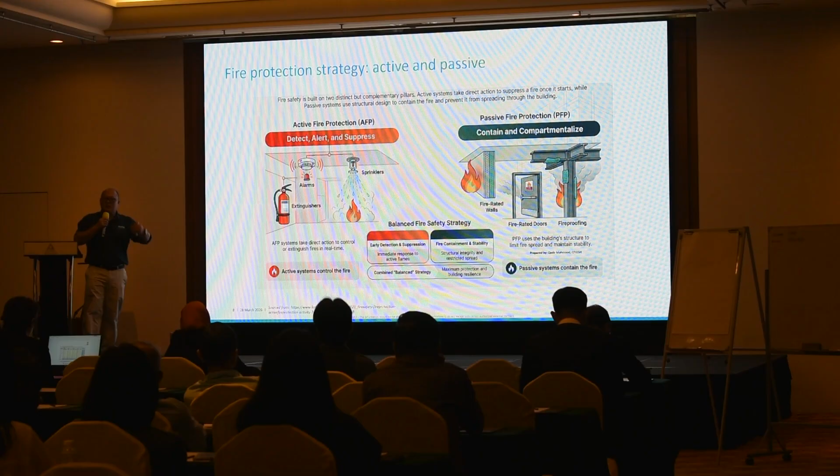So sprinklers, alarms, extinguishers, fire suppression - they are all classified as active fire protection, whereas passive is a built-in element. Once built, it just sits there silently working 24/7. So when a fire happens, the role of passive is to contain, to control the fire size from spreading to the next door, the next room, the next compartment, whereas active is the one that suppresses the fire and ultimately puts it out.

Today my sharing will be more passive. We talk about how all these solutions can integrate into your building design.

But before we go into the details, first some theory about fire: reaction to fire and resistance to fire. They sound quite similar, but the meaning is quite different. Reaction to fire talks about how the material reacts when it contacts fire, whether it burns, whether there's no reaction, or whether it generates smoke. It's all about a single material, a product approach. Whereas resistance to fire, on your right side, is about how a complete assembly, a system, limits the spread of fire and smoke.

So there are a few criteria that we measure in testing. First, load bearing capacity, sometimes called stability, noted as R, measures the stability of a system. Let's say within 2 hours, this system - a column, a beam, a floor - should be intact, it shouldn't collapse. If there's any failure, sagging, or deflection more than a certain limit, we consider it a failure. Collapse is also considered a failure. So it's all about structural integrity.

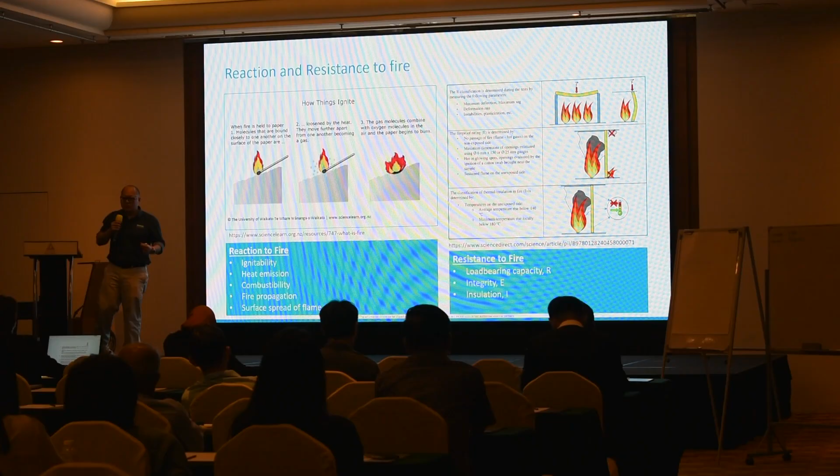The second criteria we measure is integrity, noted as E, which measures the behavior, the pattern on the non-fire side. So the criteria is basically: if next door there's a fire, with this firewall, there shouldn't be any passage of fire and smoke. It shouldn't have any crack or opening. And something invisible that we cannot see, which is the heat. When there's an actual building fire, the temperature easily goes more than 1000 degrees Celsius. So standing next door without a proper firewall, you will become a barbecue.

So there's another criteria we measure, which is insulation, noted as I. This basically measures heat transfer, how well this system or assembly can block the heat when there's a fire. The criteria is 140 degrees Celsius average temperature and 180 degrees maximum temperature on the non-fire side.

So this is just some comparison between reaction to fire testing and resistance to fire testing. Normally for product-based testing, the scale is smaller, done in the lab, where on the left is the calorific capacity test, whether we follow BS 476 part 4 or ISO 1182 - it's all about calorific capacity test, basically the top ceiling for product performance.

Then for reaction, the temperature maximum is 750 degrees Celsius for furnace temperature. Whereas for resistance to fire, normally the scale is much bigger - most of the time we need to represent the actual construction. So the furnace is also much bigger, whether 3x3, 4x5, 5x5, or even 5x7 meters.

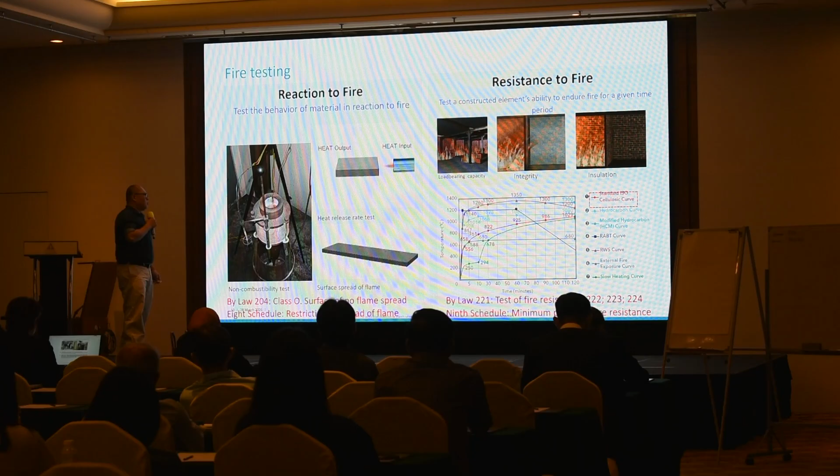There are quite a few fire curves. The red line is the standard time-temperature curve, sometimes referred to as the ISO 834 curve, which is widely adopted in BS and similar standards, basically for building fire. At 1 hour, it's about 950 degrees Celsius, and at 2 hours, slightly more than 1000 degrees Celsius. This is the fire curve widely adopted for building fire. Depending on your purpose and building group, other fire curves can be applied as well.

For example, when there's more petrochemical industry involved, then we use hydrocarbon curves. Even for hydrocarbon, there are two - one based on UL, which is more intense. At first 5 minutes, you need to reach 1200 degrees Celsius, and then maintain that for the remaining hours. But of course there are others, like for tunnels, trains, facades, and so on.

So this is just some reference for how a fire test looks like. There are different applications. On the top left is vertical testing, where we test, let's say, for partitions. The second and third work very similarly - horizontal elements, like for ceiling and floor. But in the third one, you can see there's a hydraulic jack above - this is where you need to apply a load during the fire test, making the testing more onerous.

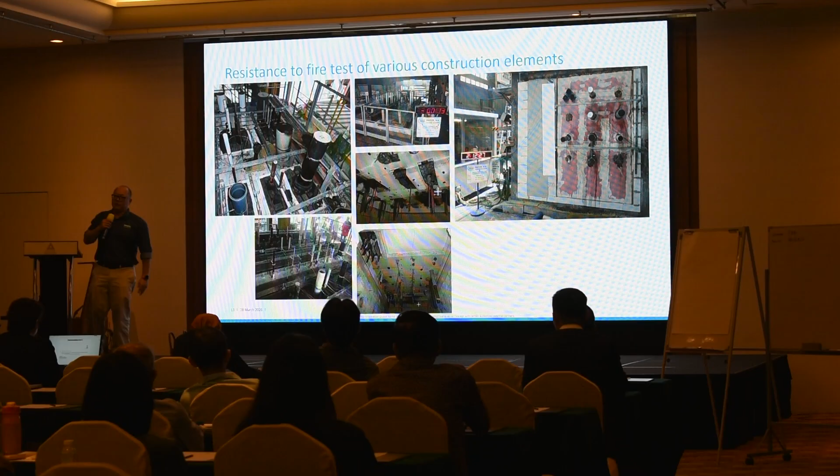So after all this, basically what we want to emphasize is product reaction to fire versus a system approach to fire. They are different. For reaction to fire, basically it didn't come with a duration, it didn't come with a time. So normally we don't say I need a 2 hour fire material, like a 2 hour fire board or 2 hour fire paint. But it should come as a system.

It's a full design, a full assembly, a system approach where the design, every component, contributes to the fire performance. For example, over here it's just a ducting, but it's not only the duct itself, not only the board itself, even the framing, the screw, the spacing, and so on, all contribute to the overall performance. A good example is wood, a flammable material, but through proper design it can become the timber fire door that lasts 1 or 2 hours. It's a system, it's a design.

Vice versa, a non-combustible material doesn't contribute to the fire load by itself, it has no response to fire, but without a proper design it could be compromised. For example, the board cracks, it collapses, and fire can still pass through.

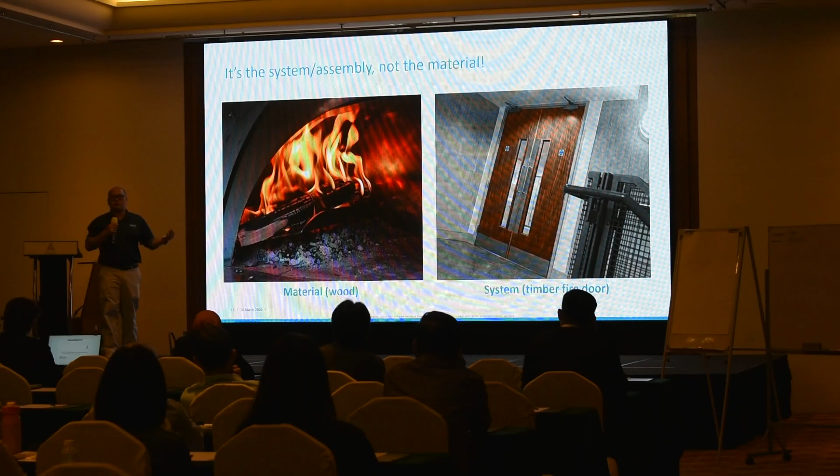At about 550 degrees Celsius, the strength is only left at about 60%. So this is the benchmark when we come to structural steel design. Critical temperature is 550 degrees Celsius for the column, and 600 degrees Celsius for the beam. This is the principle behind it.

If we come across structural steel, why 550, why 600 - of course things are more complicated than this. This is just a sharing on the case study.

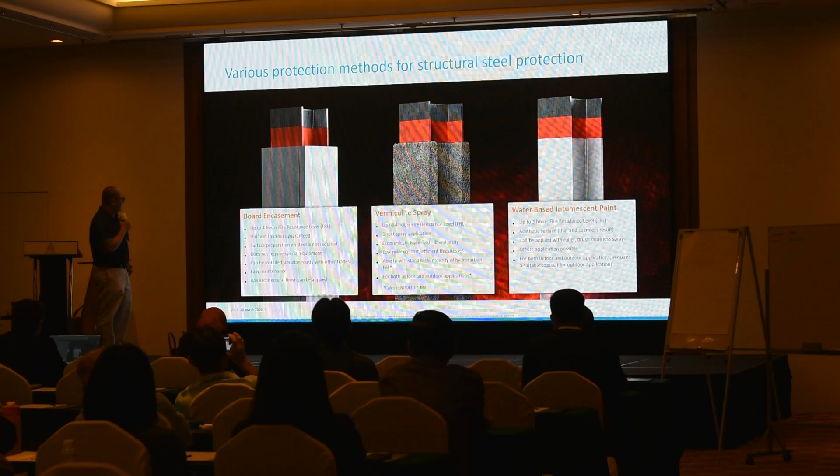For vermiculite spray and intumescent paint, basically they are considered wet works. When they carry out the application and installation, the site needs to be isolated so other trades cannot proceed simultaneously. They need to do the masking, barricade the area to carry out the installation.

Whereas for board encasement, basically it's a dry trade. The board is produced at the factory, it comes with uniform thickness, and requires a less skillful installation team, where the board is just cut, placed, and fixed to the structurals.

So, but for spray and paint, you need a skillful worker, and you need consistent QC checks during the application, because you need to achieve a certain thickness. If, let's say, a less skillful worker, then the appearance, the workmanship might be compromised; it might become wavy, inconsistent thickness, and so on.

But of course, spray being the most economical option, it is very preferred when going for a larger area, but also where the aesthetic is not so concerned, because the surface texture is rough for the regular spray. So if aesthetic is a concern, space is a concern, then intumescent paint is the preferred option. It's very thin for 2 hours. The dry film thickness is ranging around 1 mm to 3 mm, whereas your spray and board can easily be 20 to 30 mm. So it's a big difference.

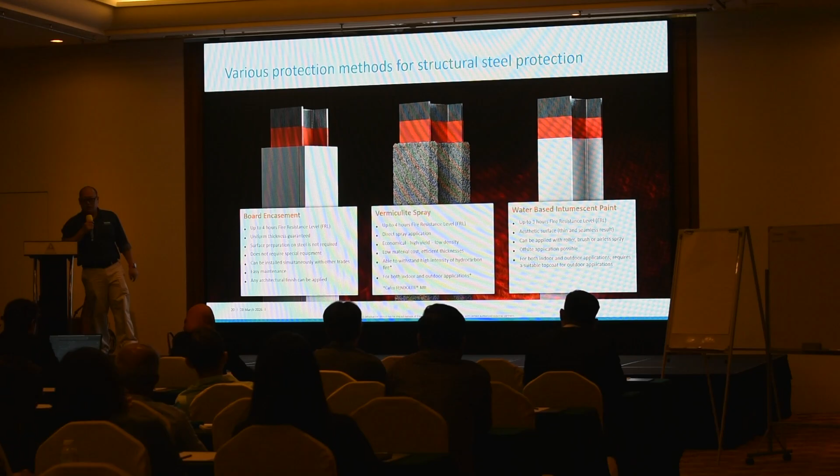And paint can be used for outdoor as well, but provided there is a top coat. Then for board, you can receive any kind of architectural finishing on top. So I will show some examples later on. This is just a quick reference between the three, from board to spray to the paint.

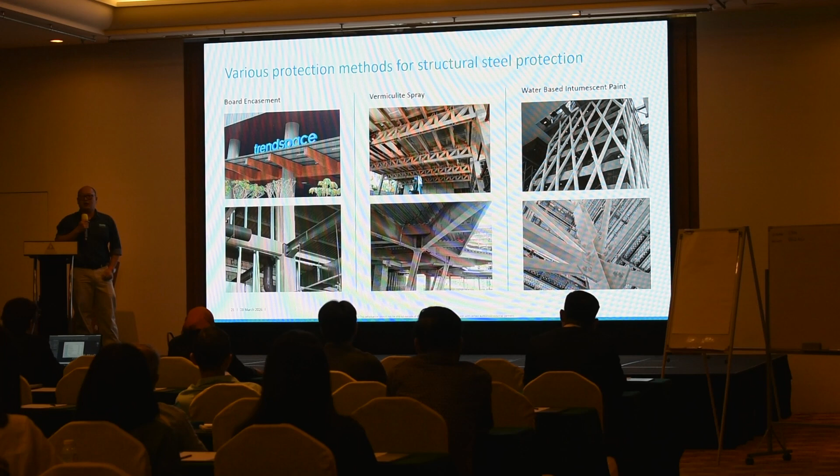So on the left, basically it looks like timber, but actually it's a steel structure with the board encasement and the timber finishing on top. For the paint, where you want to maintain the steel look, the architectural look, nice and aesthetic, then paint is the preferred option. Whereas for spray, from far it looks quite smooth, but close up it's actually quite rough and quite nasty as well.

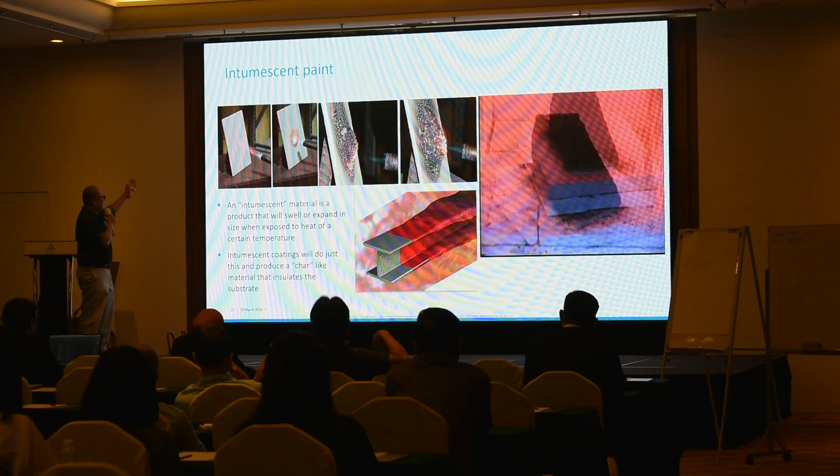So the top photo is just a demonstration. It's not a proper test, it's just to demonstrate. There's paint on the base metal; when you expose it to heat, the torch, it expands. So that's the working principle for the intumescent paint, why the paint is so thin but can provide the same rating as other protection methods.

So from here it also explains why, when it comes to intumescent paint, you need to leave a certain gap for the expansion. In the real application, if there is something attached to a steel that's being treated with paint, that's basically the purpose, because the paint needs the space for expansion.

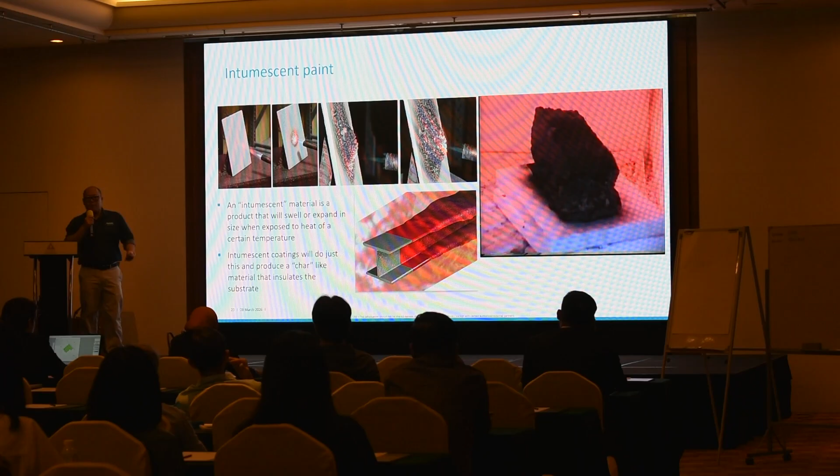So one of the benefits of intumescent paint is it can be applied off-site, meaning that it can be pre-painted at the fabrication yard, and later on the steel is brought to the site for erection, which speeds up the project timeline. This is where spray and board cannot be done.

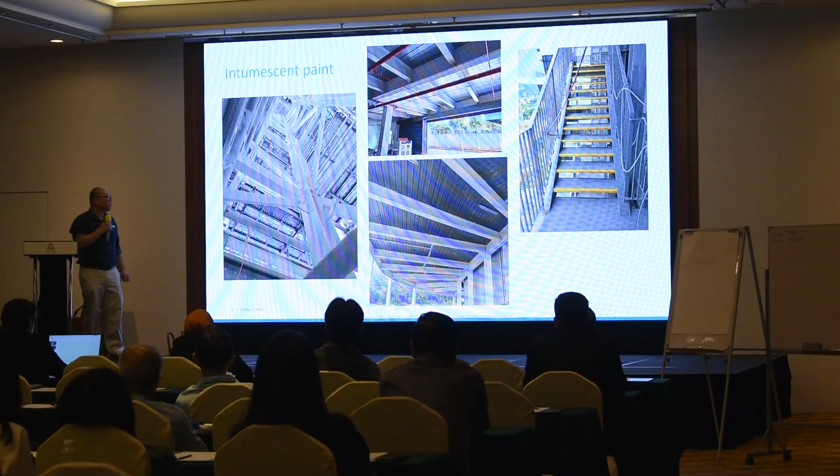So another advantage of paint is it can be applied on complex structures or hard-to-reach areas. It can also be done for outdoor application, but you will require a PU coat on top for weather resistance.

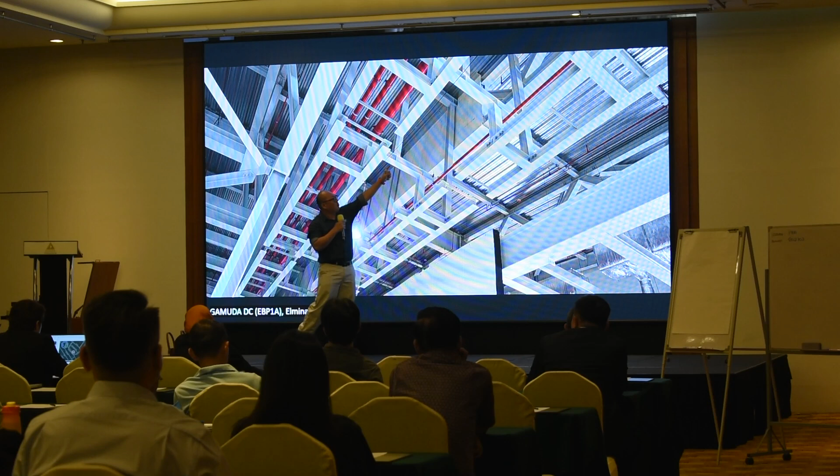Actually this is a roof truss which is already cladded with the board encasement, and on top of that you can see it still hasn't been treated yet, and there is this firewall underneath. So this firewall is meeting at the roof truss. If you're using paint or spray, there's an opening between the roof truss, so fire can still pass through. Although you have a nice firewall underneath, there's an opening above, so fire can still pass through. So this is another advantage of using the board encasement: you can maintain the compartmentation.

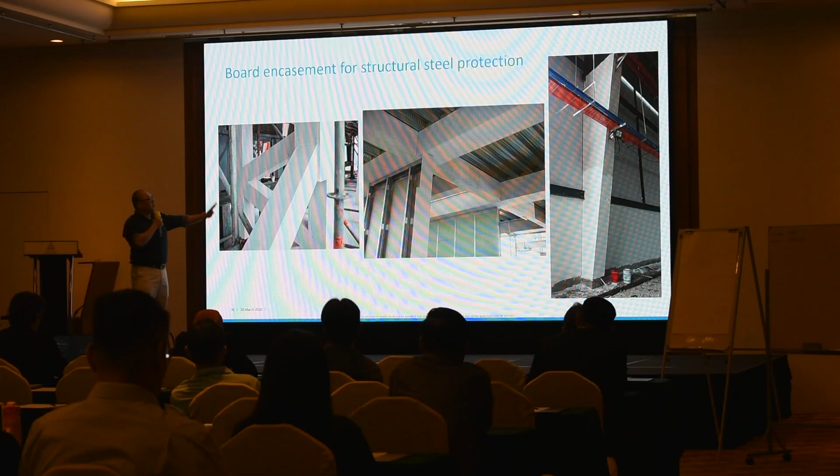So even some complex shapes can be done with the board encasement, and also when there is some partition or ceiling attached to the structure before encasement, it can be done as well. Whereas for the spray, you need to box up, there's a gap, so the structure might not be rigid enough. And also, with paint, if the structure is directly attached, it also affects the purpose. And lastly, the board encasement can work together with the partition in the same system, same approach.

So when it comes to structural steel protection, normally there are quite a lot of questions to ask, because structural steel is not as straightforward as applying what you have tested. There are a lot of considerations: what is your fire rating, from 1 hour to 4 hours, and then what kind of protection method. This will affect all the calculation. For board encasement, it's basically just a square or rectangle. The area exposed to fire is relatively less compared to the profile type, where spray or paint follows the contour, the profile of the steel. The exposed area will be much larger.

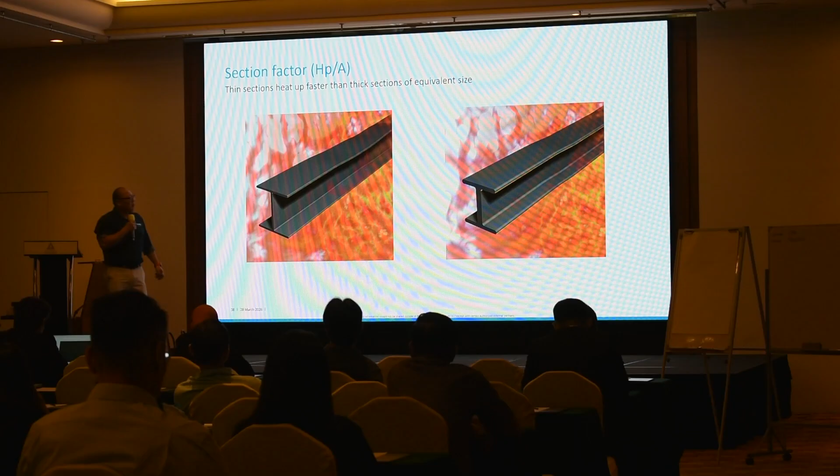Then also the exposure. Normally column 4 sides, beam 3 sides, but in certain designs it could be 2 sides or sometimes even only 1 side for strengthening. So all these will affect the protection method, the protection thickness, and of course whether it's I-section, SHS, RHS, or even CHS, or maybe plates, and so on. And outdoor or indoor. These are all the key considerations when it comes to steel. So I added this animation to explain the rule of thumb for structural steel.

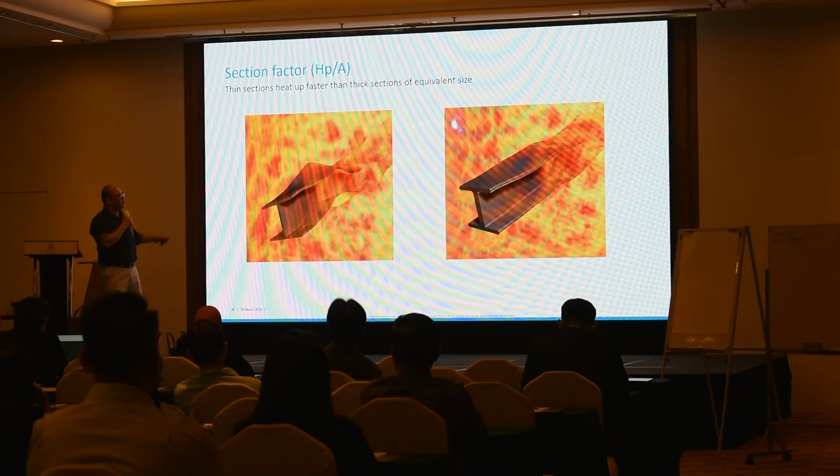So for a thinner profile compared to a larger profile, a big steel, what is the difference when it comes to protection? A bigger steel has more metal, higher thermal mass, so it's more tolerant to heat, it can absorb more heat. Whereas a thin steel profile, when exposed to high temperature, can be easily distorted, easily compromised. So in this case we need more protection thickness. So the general rule of thumb: for big steel, the protection thickness will be thinner. For smaller steel, the protection thickness will be bulkier.

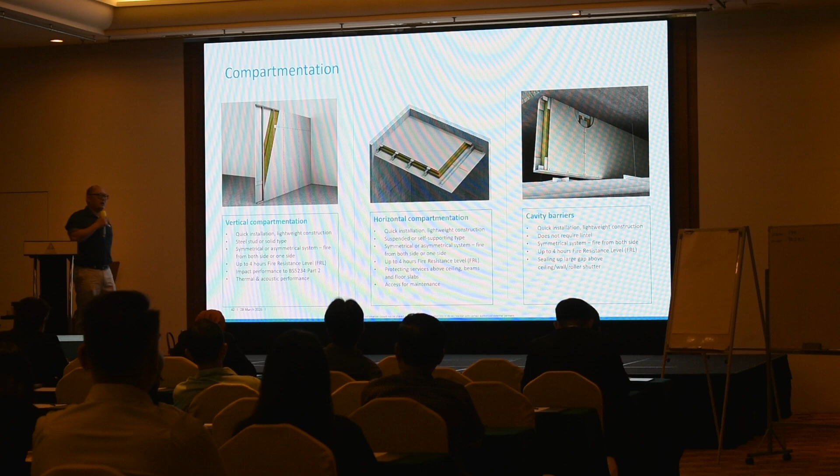So we come to compartmentation, basically where you have a big area and you want to subdivide it into smaller areas in order to control the fire. There is vertical, there's horizontal, and sometimes you have a cavity barrier, where you have a roller shutter or a door with a cavity above that you want to fire stop and fire seal. So vertical compartmentation is also a field design.

The most conventional, I think quite familiar to everyone, is a steel stud partition, where you have framing, either infilled with mineral wool or without, and then both sides are fixed with fire protective board. Normally it's a symmetrical design, tested up to 4 hours. Then the mineral wool in between is either part of the design for fire, or for thermal and acoustic comfort.

So there's also another design for the solid partition or slim partition, where there is no mineral wool. Also tested 2 hours and up to 4 hours. And in terms of the overall thickness, the partition is much thinner, much slimmer compared to the steel stud partition, which is the more general common type.

So another advantage of the solid partition is also it can be exposed from one side. It's an asymmetrical design, 2 layers or 3 layers of boards, then it can achieve 2 hours up to 4 hours. Then of course the other one is a more heavy duty, more rigid, robust kind of system, where it can even cater for blast resistance as well, blast and fire together.

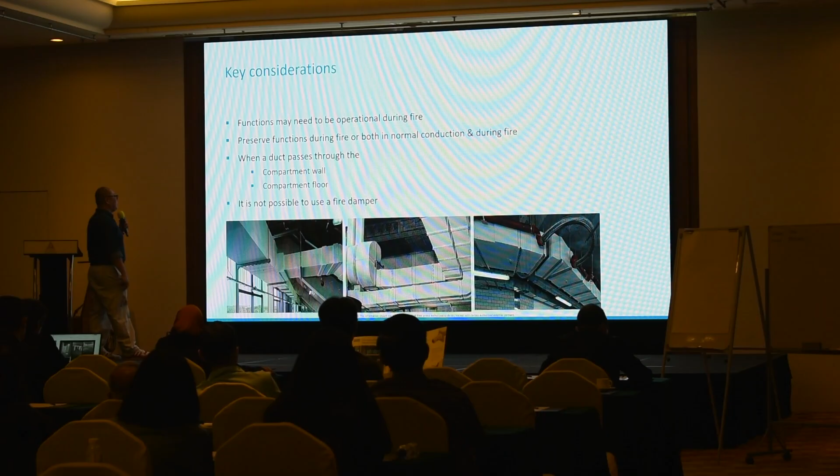And also due to the heat, you might have a false trigger. Due to the heat, about 100 degrees Celsius, for example, it might trigger the fusible link, then it might trigger the damper, or the grease, the carbon deposit, might affect the functionality of the damper. So in this kind of case where a fire damper cannot be used, the duct line, the ducting needs to be compartmented as well.

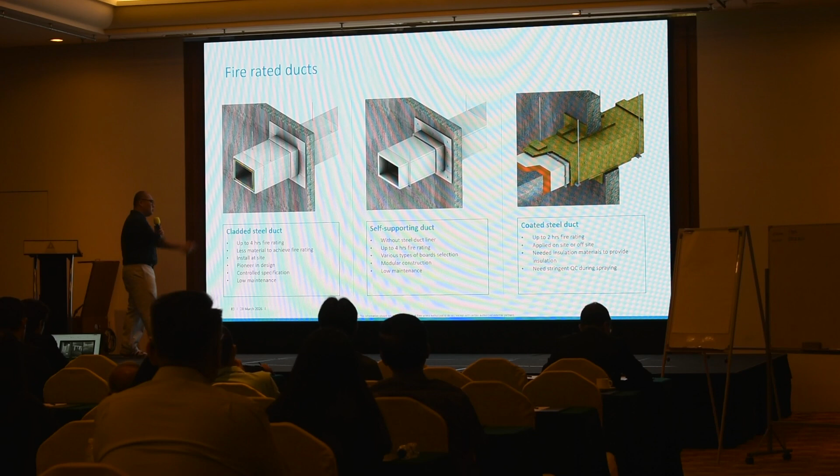So there are a few protection methods, basically where it's cladded to the steel duct, meaning that the GI duct is already up, is already erected, and I found out that actually I need to fire treat, I need to fire compartment this duct line. So there's a solution where we clad onto the steel duct, also tested up to 4 hours. Then another is normally involved in the early stage where you already know for this area I need to have a fire duct. So it can be fabricated with the board without any GI duct inside.

So the last, on the right, the option is when there's a duct, I need to upgrade it, I paint it, but I need to add a layer on top of it. The reason why is because they need to achieve stability, integrity, and also insulation when it comes to the ducting. So on the right, basically just to show some installation sequence where you have the GI duct, you put some framing on top of it, put in some infill, and later on you clad with the fire protective board.

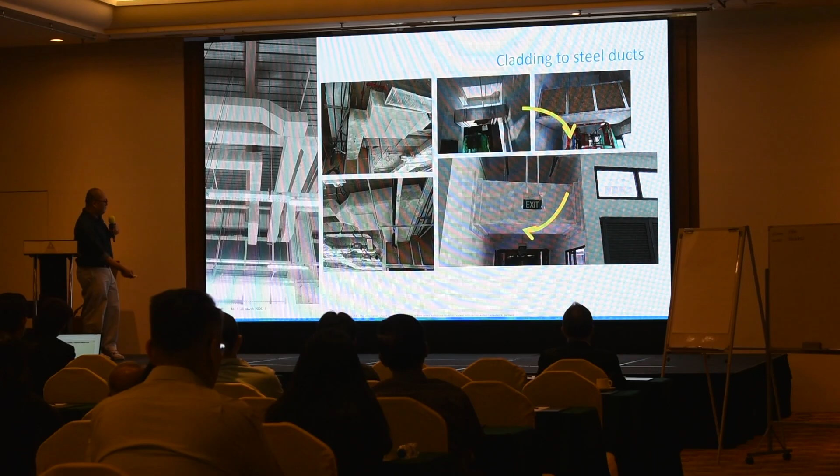So some of the references, what it looks like when we come to a solution, and generally the board itself, the hardware solution is also relatively more durable. So this is a project first constructed in 1990, and the photo was taken last year. You can see that the duct with the board is basically still quite new, still quite durable. And of course, depending on certain areas where you need to improve the further security.

So this was also a project where we used it for KL. It was initially already pre-painted, already achieved the fire safety, but somehow the client wanted to improve the security because the client felt like a thin 1.2 mm GI sheet can easily be broken into. So this is where they used a heavy duty board to further enhance the burglar proofing.

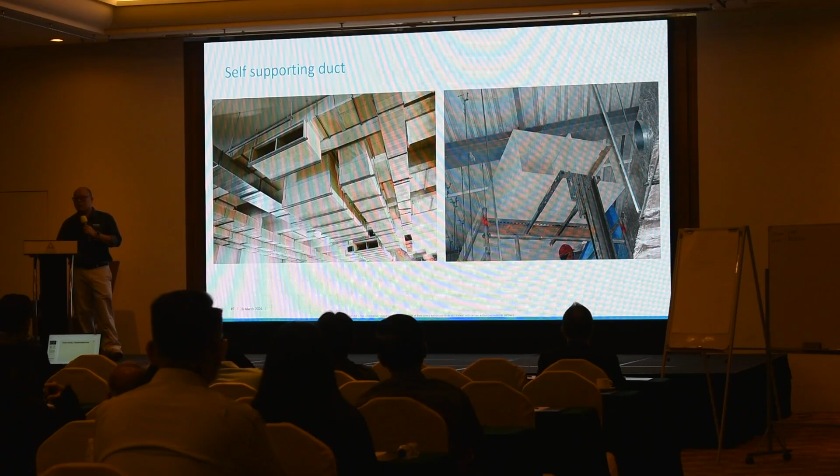And as a reference, where the duct is fabricated just with the fire protective board without a GI duct. So some examples of different designs of the fire duct as well. So other than the board solution, it can be painted or it can be sprayed as well. Both also achieve stability, integrity, and insulation. They have the same fire performance, just a different protection method.

And basically the same for cables, other than the ventilation duct, also for the cable duct. So where you want to maintain the circuit integrity of the cables, meaning that throughout the intended period, for example 2 hours, within this period, the power supply cannot be interrupted. Any interruption will cause failure because power in this case is very critical. That's why there's an additional measure for the circuit integrity.

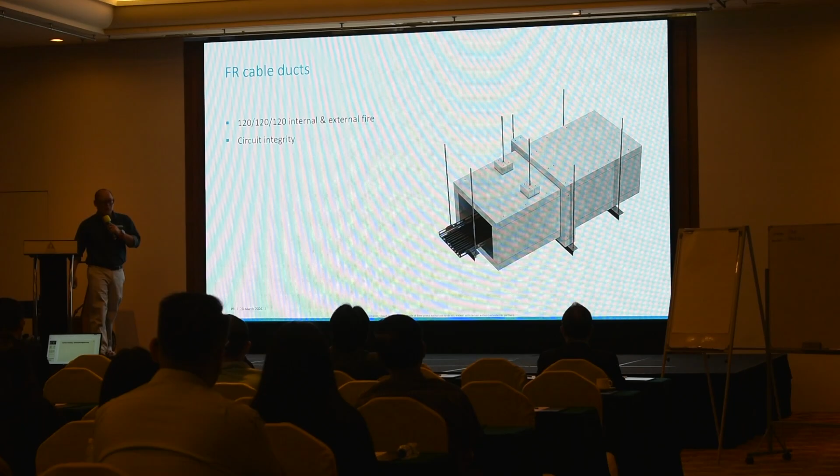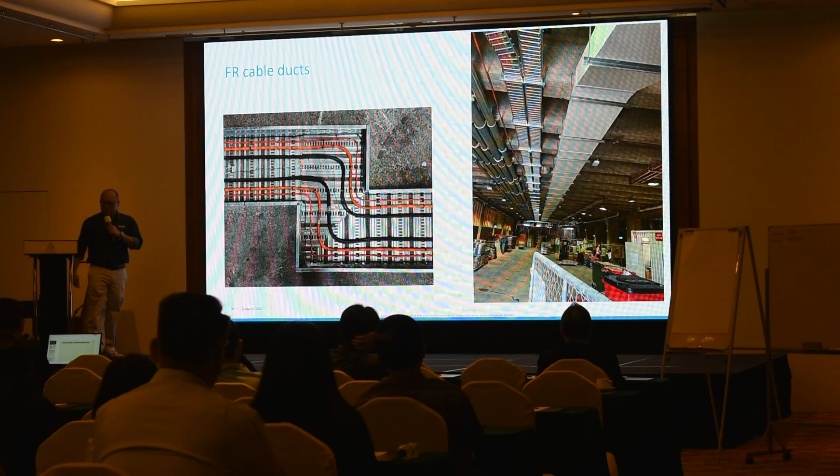So like protecting the backbone of the power. So the whole power line is fire compartmented. It's a fire stop. So for example, some of the references where the high voltage cable, the incoming cable, is fire compartmented.

So in this case, it is for fiber optic.

So who are we actually? Most people know about BricsCAD. Some people don't know about BricsCAD. So I'm going to show you a transition, a progression of where we are. I know this is a little bit interesting. So Bricsys is our company name. BricsCAD is our product name.

So our software is built on a native DWG platform. So whatever DWG drawings you have, DWG templates you have, line types you have can be easily migrated over to our application itself. There are 3 Fs, as I mentioned here, that I will be sharing consistently to the team: familiarity, fidelity, and flow. Most CAD tools give you features, but what I want you to take away is BricsCAD gives you the flow without disrupting what you already know in the DWG workflow on a day-to-day basis.

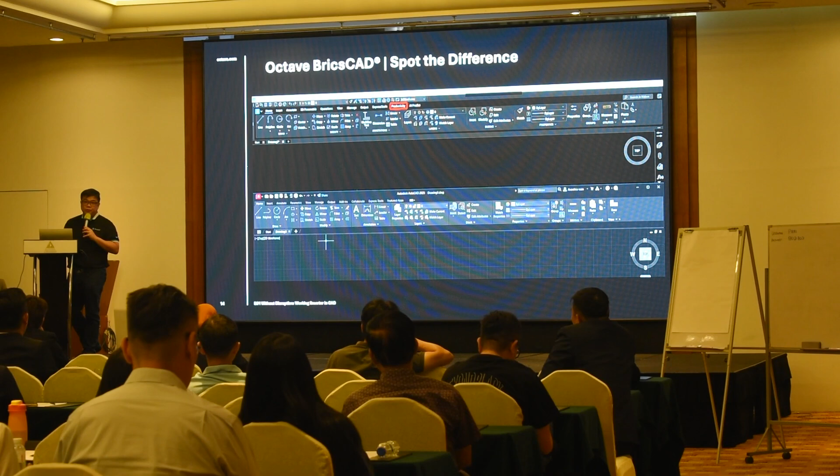So, Kelvin, what are productivity tools? You can read here as I speak. Most CAD users spend time repeating tasks. A traditional CAD command will take perhaps 10 to 27 steps to complete. But with our productivity tools, you shorten and accelerate the task completion. What I'm going to show you next is a quick video animation on one of our productivity tools called Move Guided.

All right. So as promised, Move Guided is one of our productivity tools. We have the traditional command called Move, Control M. This video is going to show you how we use our productivity tools instead of Control M to move one door from a wall to another side of the wall. Simple. It is not a complicated task, but in a traditional CAD command, it takes you more than 20 clicks. You need to create a reference line, you need to move, rotate, add, subtract, heal, etc. But with Move Guided, we only need 3 clicks.

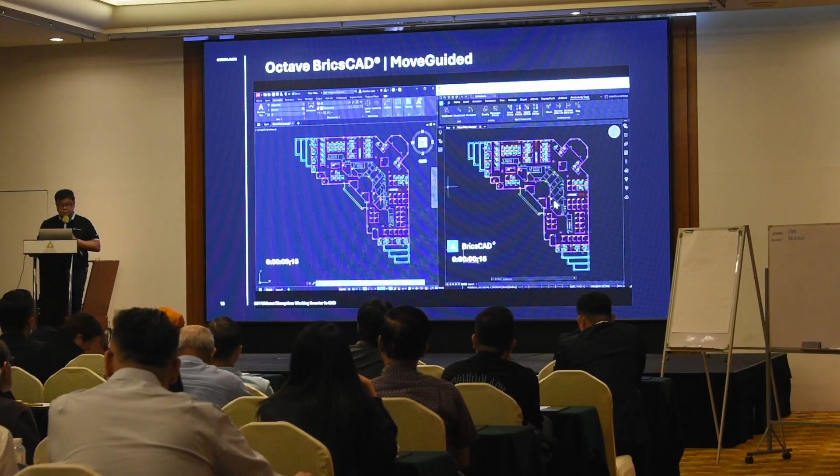Now, as I mentioned, the title is BIM without disruption. How can I omit sharing what Octave BricsCAD BIM itself is? I want you to take note that our BricsCAD BIM is not trying to replace your existing BIM authoring software.

Okay, so if you have existing Revit, ArchiCAD or the like, or if you're into the 3D experience from that sort, and you find that you're not going to change your workflow, continue using it, okay?

But what we are trying to solve here with our BricsCAD BIM is this. Listen carefully, it's going to be thought-provoking: how do CAD users move into BIM without starting from zero? We are a DWG-based CAD software, okay?

With, of course, AI tools to help you accelerate to get your 2D users into BIM readiness without disruption. It is very easy to learn. So with this, I'm going to show you another video. That video is going to be at one times speed, because I only got 20 minutes to complete this before I hand over to my colleague, so I will explain along the way.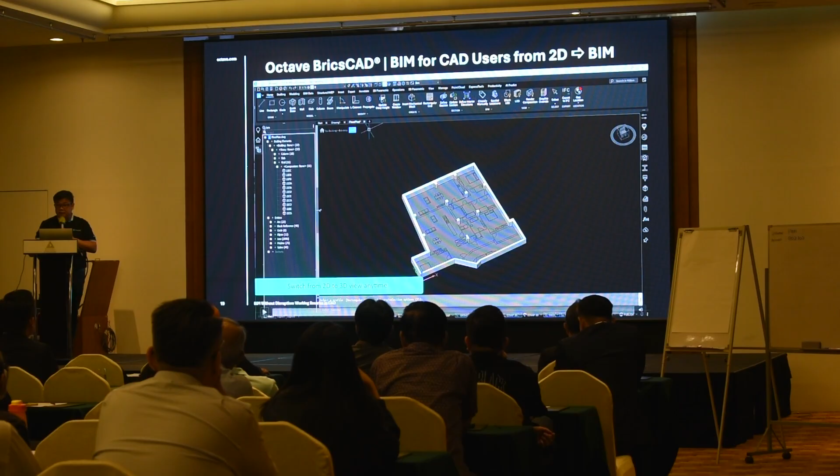We are creating a slab immediately. And we are doing the columns, auto-detecting the columns even in irregular shapes. I'm going to pause here. And once we rotate them, you will see, hey, it is a 3D model. Alright? It is as simple as tracing, extruding, and detection.

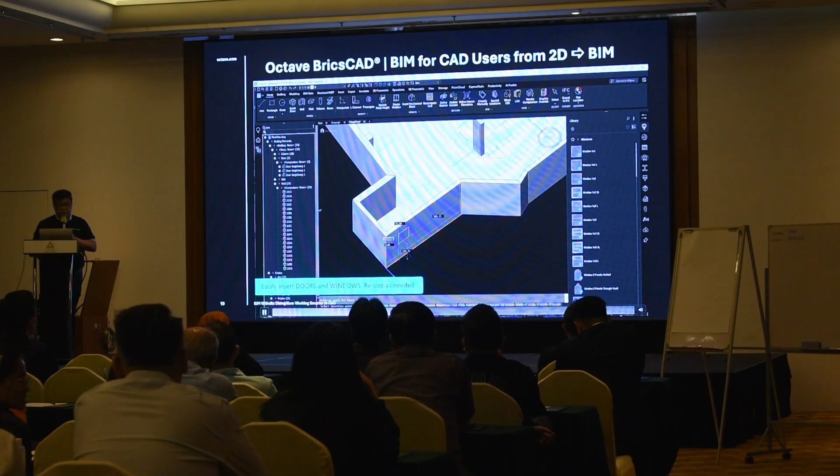Okay, the fantastic things are going to come. I'm creating internal walls right now, placing my doors, putting my windows which are parametric. You say, hey, I forgot, I need to recreate beams there.

Immediately you can edit elements and reclassify them as a BIM. BIM as in BIM. Now, I'm going to pause here for a while, and I'm going to show you this.

BIMify, if you notice over there, is actually one of our AI tools that actually auto-classifies your model into BIM elements, into spatial properties, okay, whereby you do not need to remodel with any steep learning curve, and once it's done, you can actually key in your BIM properties.

For example, if you have created an MEP duct ACMV and you want to put from that particular material into it, right from the click, once you've converted that ACMV into your BIM element, you can key in their name and maybe warranty if they have. So these are the things that are going to accelerate your BIM readiness without disrupting your workflow. If you notice, it is all about tracing.

This particular video is to do 2D to BIM efficiently. Let's continue. Same floor plan, we propagate and we do a quick draw to replicate it. Floors are being defined, and then with that, I'm going to stop here and let the video play.

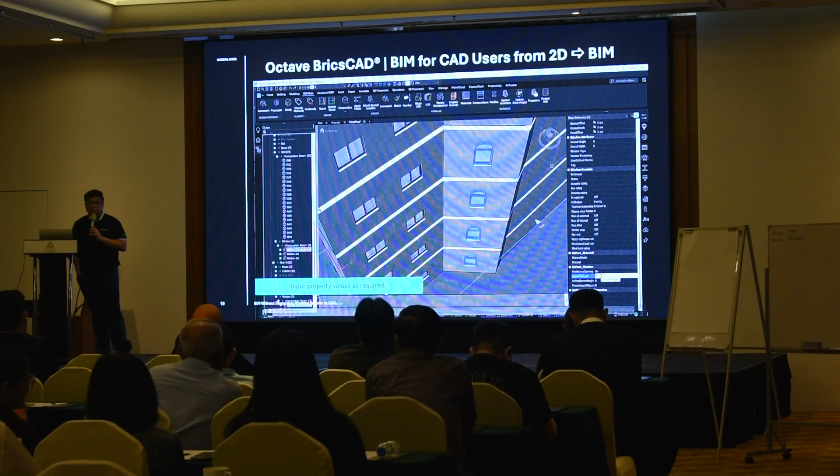This is a government requirement from Singapore. What we did is actually the digital CORENET X submission, whereby we actually developed with Singapore for the authority to be set for approval itself. So I'm just going to fast forward and move to the next one.

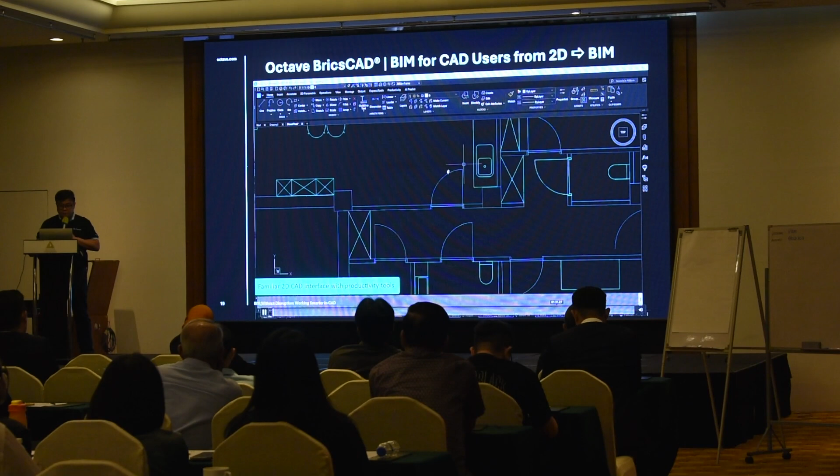Okay, these are the unique workflows that we have. Again, in BricsCAD philosophy, we do not need multiple tools and different workflows. Ours is pay what you need in terms of the licensing. During the technical demo, my colleague Claire will show you.

Okay, one platform from 2D drafting to 3D to BIM. Okay, no translation. Everything is DWG, and we believe and we practice OpenBIM. When we want to collaborate our BIM model with other BIM authoring software, we export it to IFC, IFC4. We are in the process of getting officially certified for the infrastructure IFC right now.

So with IFC model, you all know what IFC is, I believe. So with an IFC model, you can actually freely collaborate with a lot of other BIM authoring software. So interestingly, these slides will show you the additions that we have.

So BricsCAD Lite is the alternative to your AutoCAD LT. Okay, what makes us different is our productivity tools. And of course we have full LISP integration whereby we give you the engine within our environment to edit or to program the whole LISP. Full engine.

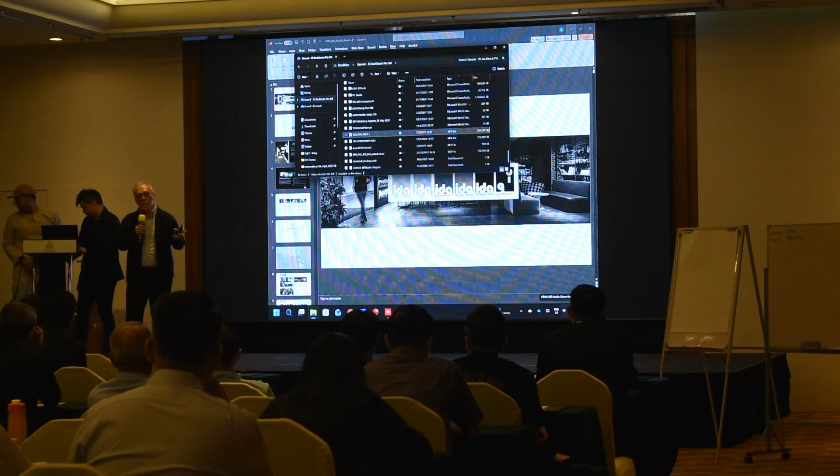Then my career has been in Singapore for the last 30 years, and I only started to actively get involved in Malaysia about 6-7 years ago. Actually, the Penang connection was that I used to stay with a Penang landlord, so I understand Penang Hokkien a little differently than other Hokkien.

I got connected with Penang people also because of AI. I first heard about AI when I was in university, and I was with a Penang boy at that time - his name was Samuel. If you know him somewhere, you should find out. He was a computer science student, and back in the 1990s, every meal he was talking to me about AI. He said it's coming, it's from Penang, not from anywhere else. He was studying this - they were doing a lot of high-level AI in those days.

He was the one who scared me about AI. I heard so much about AI is coming, AI can do this, can do that - 30 over years ago, more than 25 years ago. That's where I got immunity about AI. So if today you hear AI is coming, you'll probably first try to turn your head to figure out what it's all about, what it has to do with you, how does it impact you. I think the usual question you'll ask yourself is, what's my role in the future, in the AI era?

So what do I do to address all these questions? I'm not going to entirely talk about AI - I'll leave that to my colleagues to speak on - but I'm just a practicing architect like any of you, and we're all facing the same change in the industry, change of environment, change of tools. So how do we respond to it? Maybe I responded a little differently than you, and my sharing is that everyone is able to do that. That's my topic today, and how do I pass this on? I think I'll start with the first part.

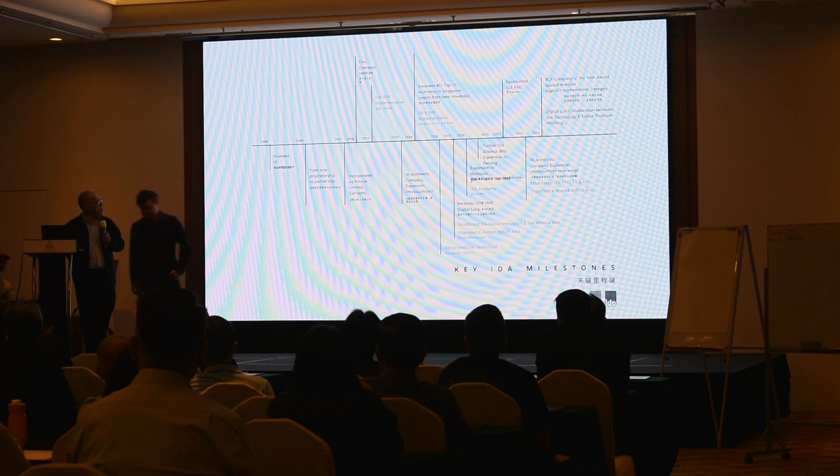So this is a group of companies - we are architects, currently several companies. I want to share, not so much about this, the companies are Singapore based, our team support, there's a lot of building. But the journey began when I came to Singapore and worked. I joined a Singapore company on my second day of life in Singapore, and I chose a company among a couple that offered - I chose a smaller sized company. At that time it was about 6-7 years old, a very young company, but the founder who started this was 20 years older than me - he started quite late, so to speak. When I joined, the company was just a small setup of about 10 people. I became a partner in the company about 5 years later.

Eventually, another 5 years later - which is 20 years ago - I started to run the company after 5 years of management. At that time the company was still about 10 to 15 people. We decided to grow the company because if we don't grow, don't change, we're just another architect, another kid in the market doing anything. So we decided 20 years ago that we need to be clear about who we are, what we can offer in the market. We decided to specialize in some aspects of work, some areas we wanted to become good at, especially areas that people don't want to learn or that architects don't want to touch too much.

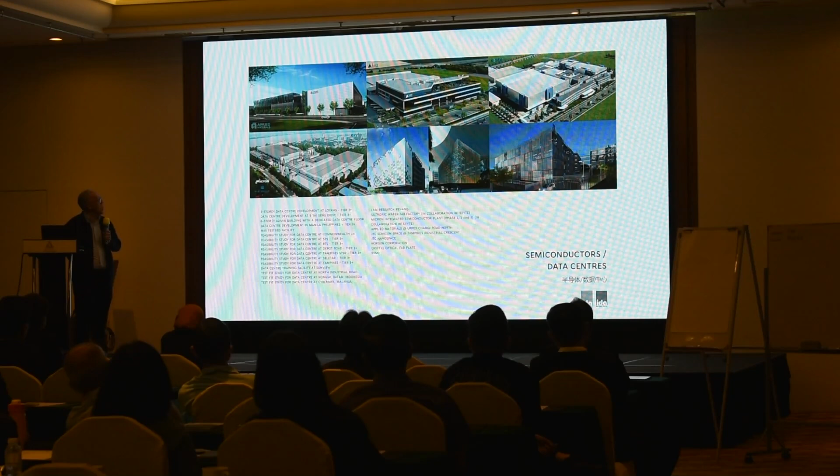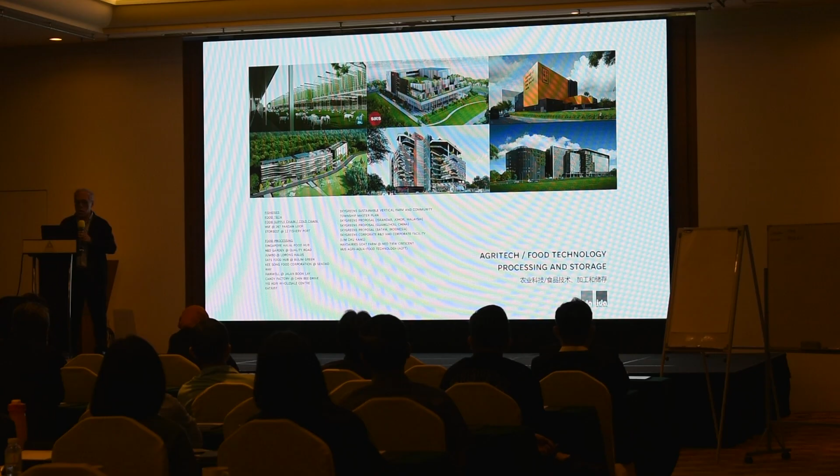Let's quickly share some of this consolidated work — like semiconductors in different places. This is chemical, biopharma related unit buildings, industry. This is infrastructure involving ports, wastewater treatment plants, and so on — more infra related. This is related to aviation, automotive kind of works. This is related to agri-tech, food technology, and processing storages.

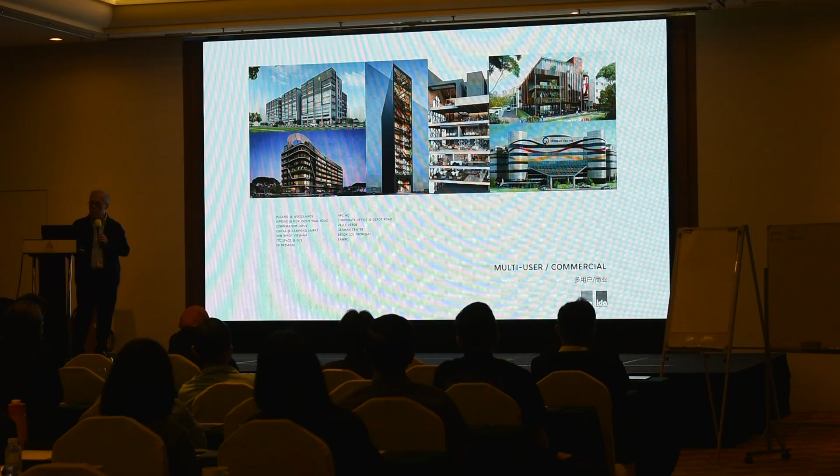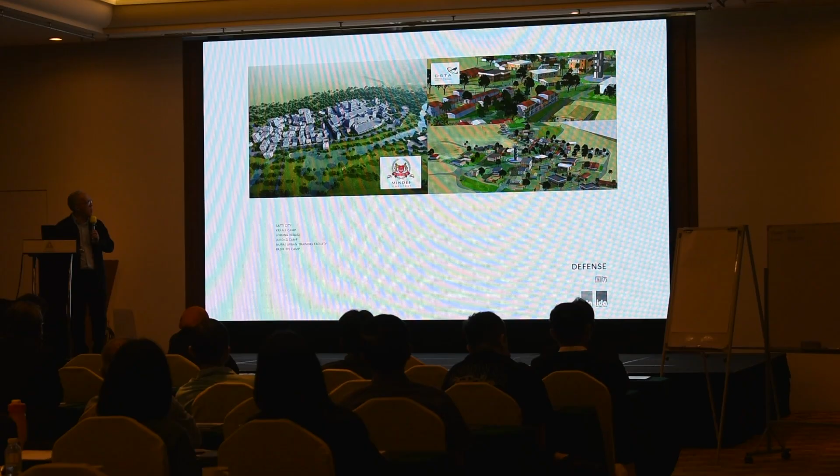We also do large-scale planning, master planning, and work involving sustainability, with a lot of timber buildings as well. These are more commercial and multi-tenanted buildings. Other typologies include high-rises or residential, though these are once in a while. This is military related — there's a lot more, but this is just what's allowed to be shown because it's available on the internet. Institutional work could be schools, from primary school to university, different types of institutions.

The other thing after we reached that stage is we do a lot of collaboration. In our current collaborations, we work with companies in Japan, for example — Plantec Architects, Taiwan's architects, and Australian engineers. This allows us to work very closely to expand our shared resources and shared expertise in that region. Together, we're now covering over 20 cities — from our own 7 locations, expanded to the rest of the network of about 20 places.

These are our signings in Singapore, with the Japanese as well as with the Australians. With the Australian company TTW, who are structural engineers, they are very good in a few things — digital is one area they're very good into, and the other thing they're good at is timber engineering wood buildings. So we have collaborative plans to develop R&D to push beyond those boundaries — from design planning, technical design, all the way to engineering, to make it a seamless, integrated delivery. Some of the content is quite technical, and that's how we do this.

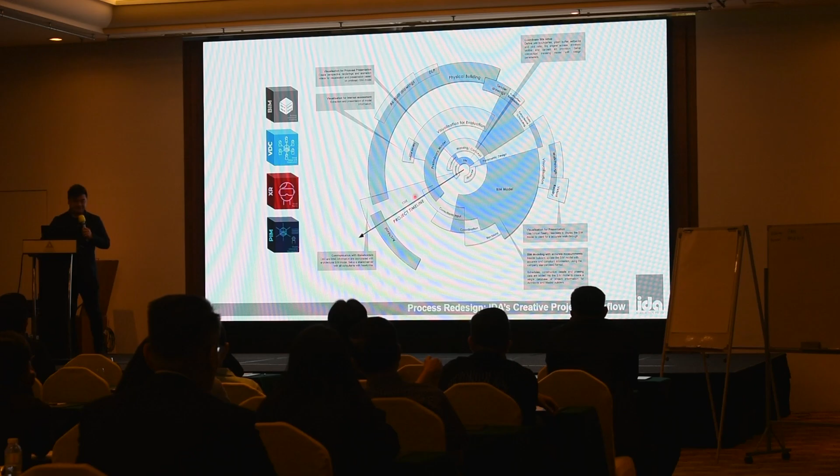Another one would be CDE, so common data environment, where we try to make sure that everyone is communicating on the same platform. So rather than you having to send a lot of information through emails, through WhatsApp messages, we make sure that every stakeholder in the project has access to a common data environment and is able to access the information that they need.

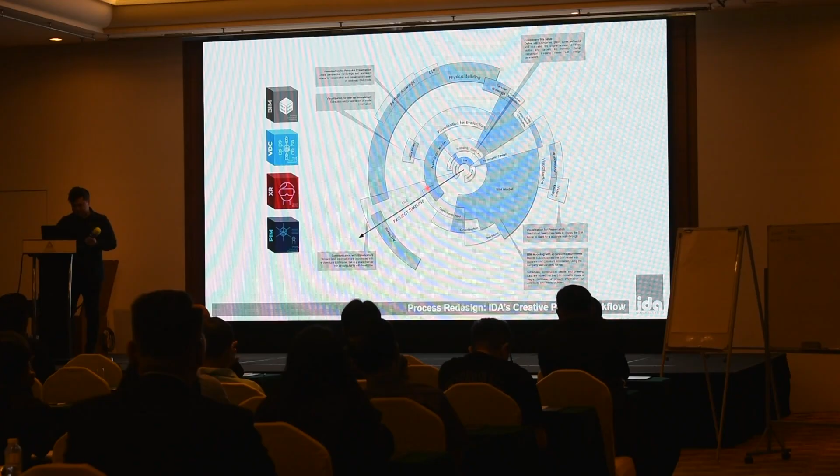Okay, so about our VR solution. So we developed our own in-house VR solution called BIM Matrix. So why we did this is we realized that all the features we need, the kind of application we want, nobody from outside the industry is going to develop it for us. So we had vendors, we used to work with software developers outside the industry who came from a software development, engineering or gaming background, where they would say, okay, this is the kind of software that other industries use and we'll develop it this way, and the construction industry will use it this way as well.

But it wasn't really applicable for what we wanted. So at some point we realized, okay, if we really want this solution, we're going to have to develop it on our own. So that's when we started developing it in-house.

So how we developed BIM Matrix, our goal was for it to be an interface into the BIM information. I think we've heard a lot about BIM, how great it is, there are these detailed models, what information is inside. One of our biggest problems with it was how accessible this information was. We realized a lot of our own architects weren't able to access the BIM models as well. So the people making the submissions might not have seen the models before it goes to the authority side.

Certain stakeholders, especially the clients in the projects, the developers, they have no access to the BIM model. So even if we hand it over to them, they don't know how to open it, they don't know how to manipulate the model, get the data they want. So VR was a very natural solution for this, where we can put on the headset, we can see exactly what's in the model, and we know what will be built before we actually go to the site.

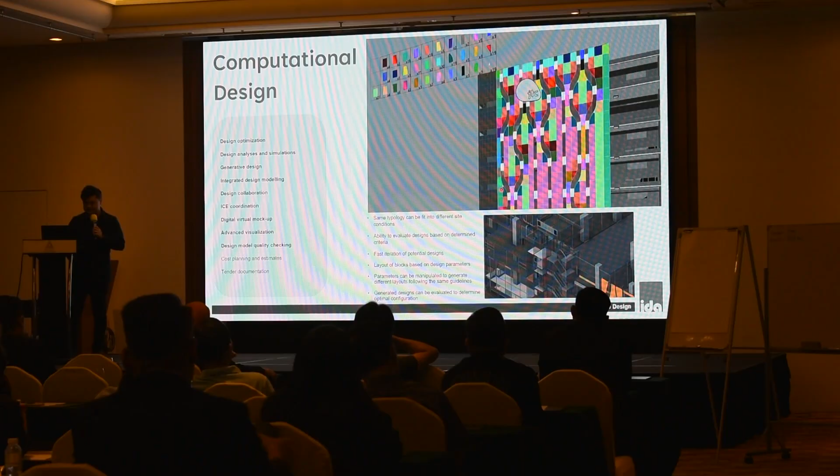Where here you can see certain images: okay, what happens when we shift this floor plate, what happens to the GFA, what happens to the ramp, the headroom of the ramp, and does everything still fit? Are we still within the boundary? Do we need to reconsider the setback or whatever it is? All the way down to facade fabrication, how we look at altering the designs, making sure that we can fabricate it on site after that as well.

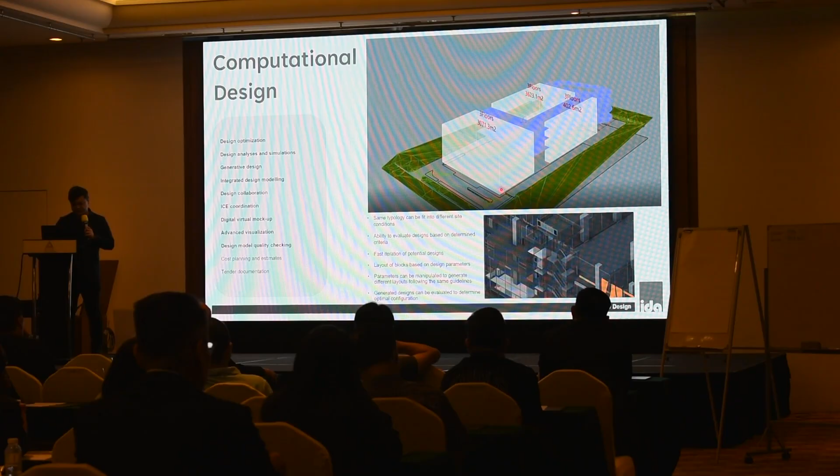So this would be a bit on design for manufacturing and assembly, where we look at a typical design process, how we get to fabrication and assembly on site, and how we could optimize that by using technology to address all the concerns from design intent to structural concerns from the engineer, cost, time, safety issues from the contractor, and all the fabrication requirements from the manufacturer as well.

So we essentially develop scripts to automate all this to make sure that when we design, we go directly to manufacturing and eventually installation on site.

So AI, I think now everyone's aware of AI thanks to companies like OpenAI. Everyone's used it in some capacity, whether it's ChatGPT, Gemini, something to give you results on writing copy or doing research. So everyone's aware of the kind of capabilities that AI has, and I think it's only going to grow.

But for us, of course, it's how is AI relevant to us in construction? What would be the kind of applications we can use it for? So on our end, we've identified two main applications. One that you see here is really AI for production, for generation of images, videos, content. My colleague Celeste will talk a bit more about this later.

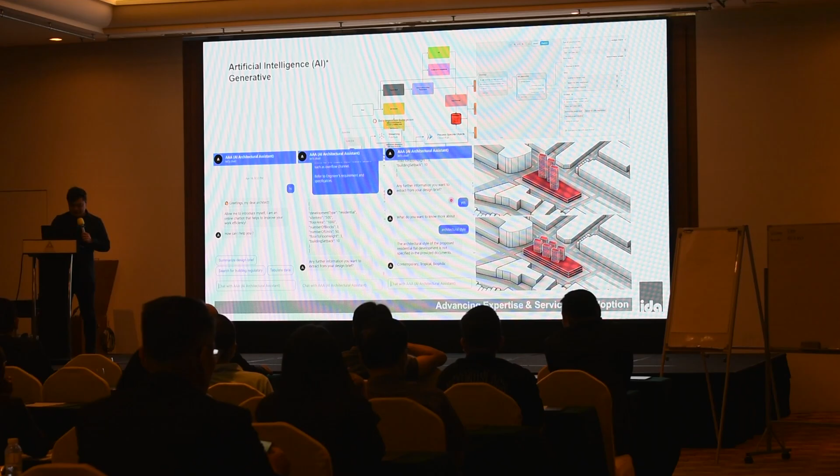So, okay, maybe from here, I'll just do a quick demo of the kind of topics that I've covered so we can get a better understanding.

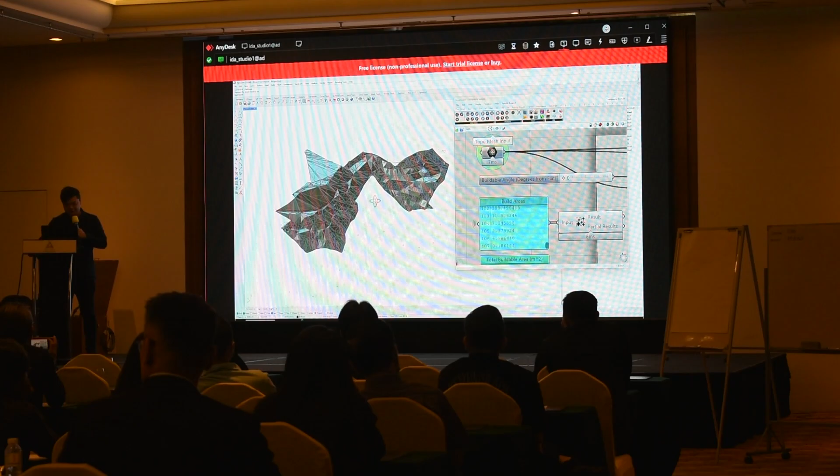So what we see here, now that this is reading 0, we can see all these areas highlighted on site in blue. It's actually all the areas on site that are perfectly flat. As we increase this, you can see that it starts to highlight more and more areas on site. So it's telling me now that all these highlighted areas are 18 degrees or less slope from the horizontal. And we are telling it, okay, can you just add them up and give us a total area that all this is covering?

So this is a very quick way that we can look at a data-driven kind of analysis. We know that it's very accurate, it's correct. Whether it's to comply with code that says, okay, you cannot build on any land that is steeper than this angle, or we want to optimize and say, okay, this is the area that we want to build on first so that we can minimize cut and fill operations, minimize retaining wall works and that kind of stuff.

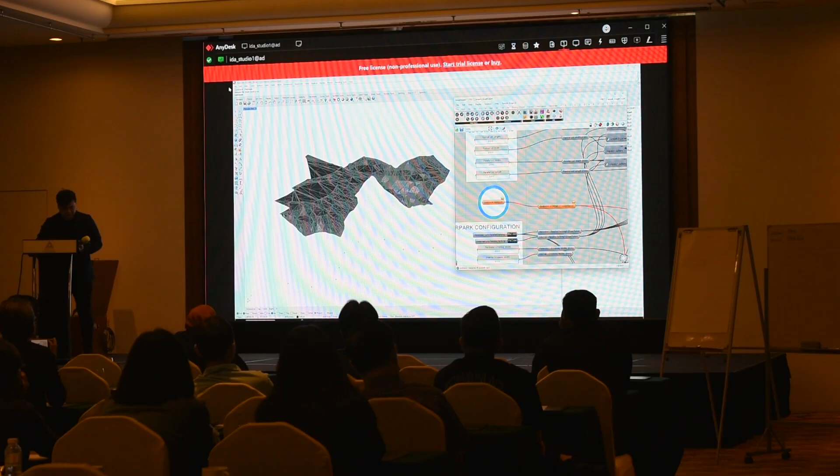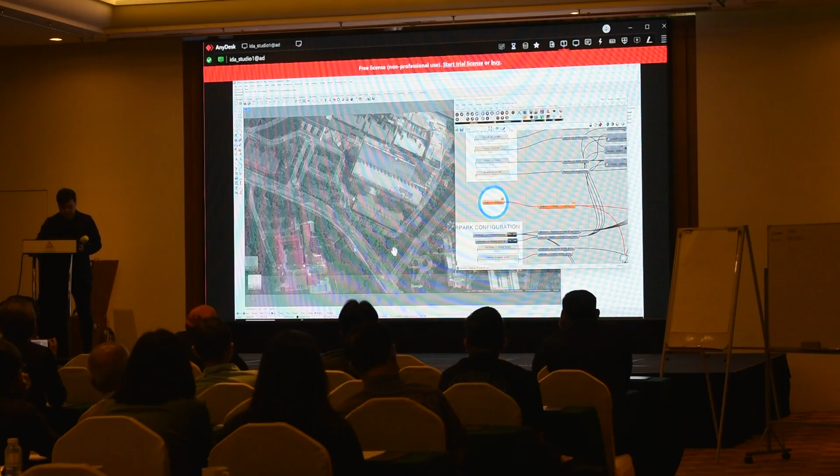Okay, another application which we use the tools for are automation and efficiency. I think every time we see a repetitive task that we do over and over again for every project, we start to see an opportunity of how can we start to develop a script, develop some intelligence that can help us so we don't do this task over and over again. So one of those tasks is car park lots.

So car park lots for every project, and there's actually a very fixed way to generate it. We know the size of the lot, what happens when it's a parallel lot, a perpendicular lot, what's the size of the driveway, one-way, two-way, angle lots, all that kind of stuff. It's all detailed in the handbook, but for us to go and execute it, it's opening the CAD files, making one car park lot size rectangle and manually placing it one by one just to figure out, okay, for this plot, how many lots can we get out of it.

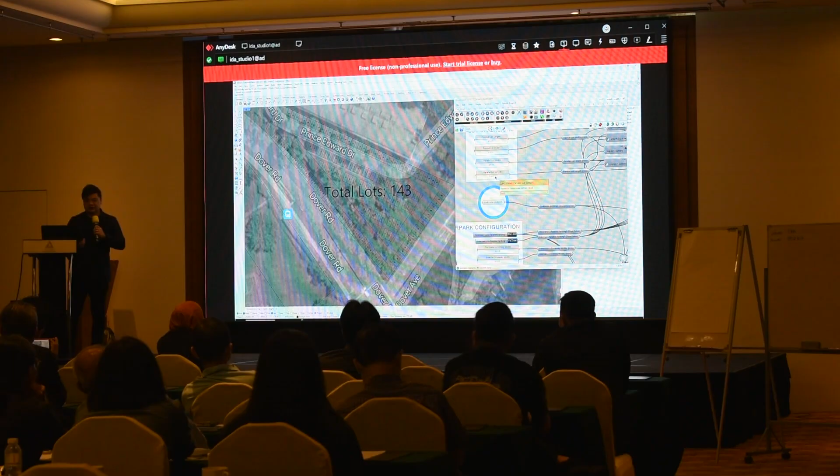So what we did is we developed a script to do that, where we say, okay, this is the lot we're looking at, you plug it in, and can you just tell us how many lots we can get out of it. So, a very simple automation, but can actually save us a lot of time as well. And we know, okay, there's more than one way to put car parks in the lot, right? We can change certain parameters as well, where we can say, okay, what if we shift the lots to parallel parking? What happens if we try and squeeze the lots together to see if we can get more lots?

Or what if we say, okay, actually our boundary is slightly flexible. What happens if we made it slightly bigger or smaller? Can we maybe try and squeeze out one more lot in this case? So we can try and adjust our boundary. And we can see actually with a small change we could get 6, 7 more lots out of it. So even a simple operation like this, to do it manually, we're taking half a day, a full day, and we're not even sure of the results. So here is something that lets us automate it and be confident about the result very quickly as well.

Okay, I think another application would be ramps. So whether they are pedestrian ramp, car ramp, heavy vehicles, actually all the same thing. It's just what's the allowable gradient, what's the width, what's the turning radius. Otherwise, they are all just slope incline, right? So typically, we are always looking at the headroom issue after that. So when we go up in one dimension, quite easy to calculate. We know rise over run.

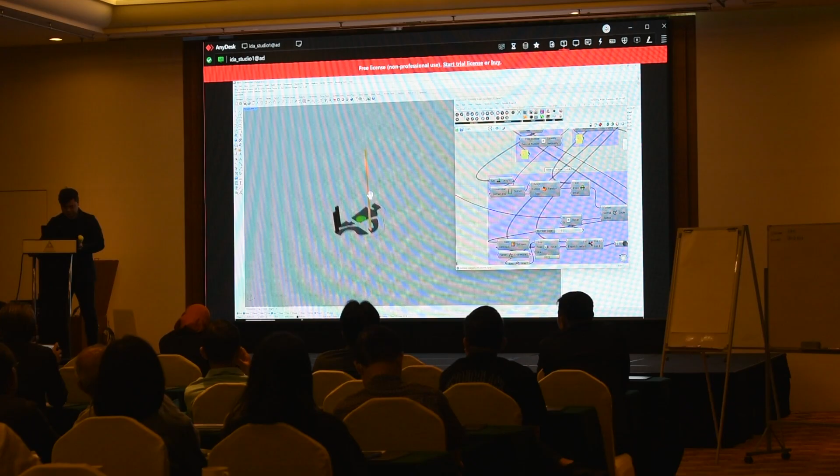Typically this is where we evaluate it. We start looking and saying, is this what we want? Or we can use more empirical methods to evaluate it. How close are all these blocks to the nearest MRT station? What are the number of units that have a good view? And all this kind of thing, we can say these are what we're looking at and give us more results that look like this.

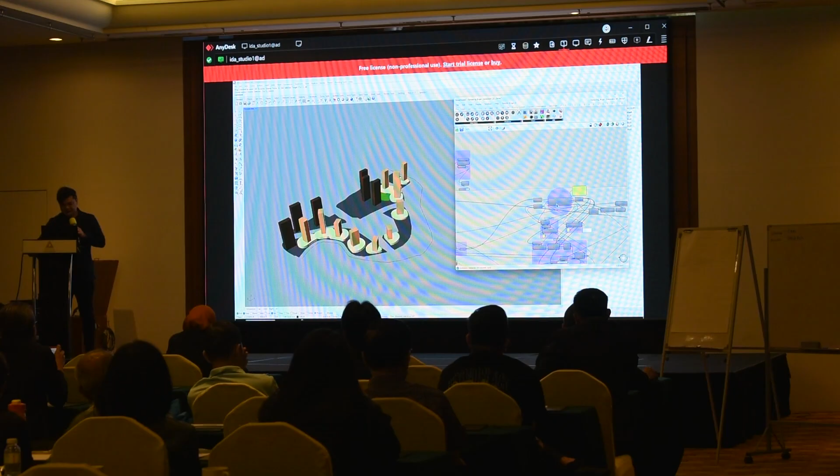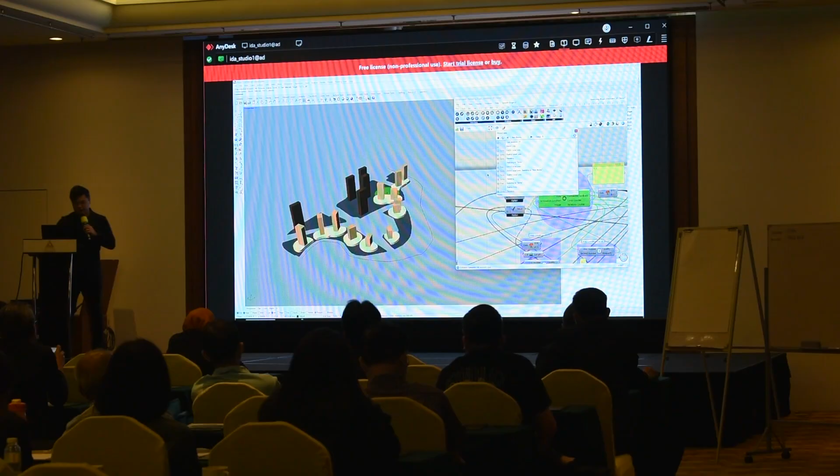So once we have that, instead of the typical process of now we're going to pre-calculate everything, which takes at least another 2 weeks and all that, we can quickly regenerate and say, take our new parameters into consideration so that it works. So you can see really instantly it's said, okay, new parameters, more blocks, shorter, we shifted the buildings out of the green area, and this is something else that works as well.

So this is great from the quantitative aspects of things. All the numbers work for this project, but from the qualitative side, this is still not exactly what we want. So if you want to sell a concept, an idea to a developer, this is going to be a premium result kind of thing, this image isn't going to cut it.

But the problem is if you go and do rendering production, then you have to model everything out, it's going to take weeks and weeks, just for a proposal kind of thing. So what we can do here is we can put another layer of AI over this.

When we say okay, this is our layout of the blocks, we know all the numbers are correct, the GFA is correct, and it gives us an image that we can use to sell this concept. So we give it a prompt: okay, this is a waterfront development, whether it be sustainable, futuristic, and all these kinds of things.

And you can see immediately that it gives us some feedback. So, okay, not perfect, but it's gotten all the key parameters right, the number of blocks, orientations relative to each other. So as opposed to if we just use AI and say...

Okay, we are giving you this prompt and then generate something for us. I think this is probably more familiar - just give it words, text, and say okay, create something. You can see here this is maybe an interesting image, but not so relevant because how do we know what's in this? We don't have much control over it.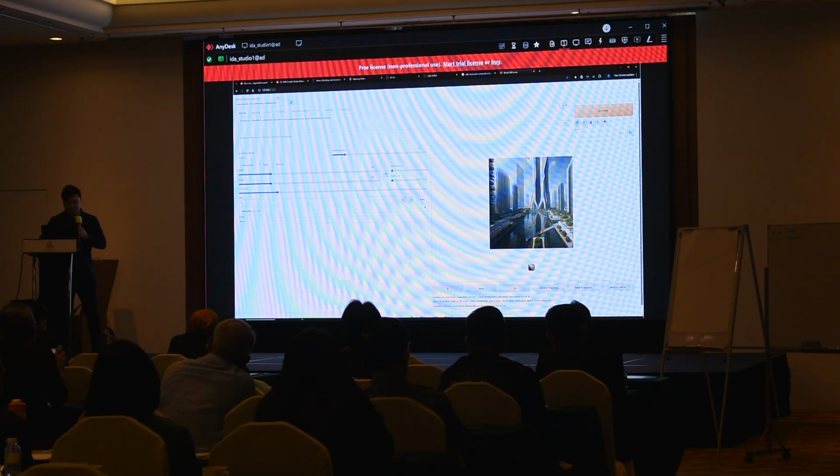So one of the key points here about AI, I think, is how we use it would be how much control we actually have over the AI. Can we get it to do what we want rather than what the AI wants? So rather than us designing for the AI, we get the AI to work for us within our design, within our parameters as well. So I think this is just a quick overview of all the different technologies we have.

So specifically for this visualization AI, I'll let my colleague Celeste tell you more about it as well.

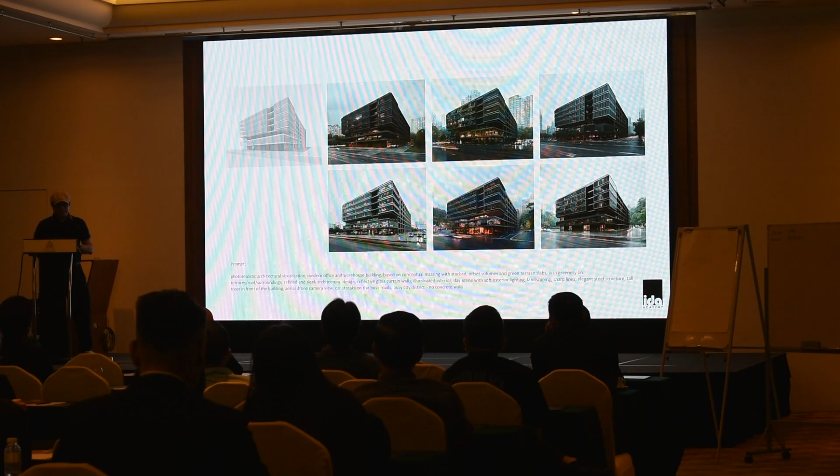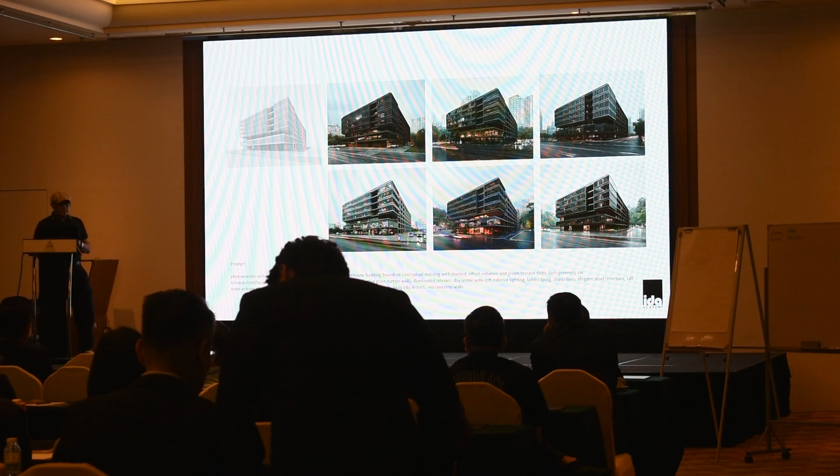This is one of our really good examples of how we maximize AI. We were invited for this project and were only given one day to come up with the proposal. The one on the left is the base 3D model we were able to come up with, addressing all the basic requirements of the project, building the base blocks and massing. But the next step is how to translate this into something more presentable. With the aid of AI and a bit of prompting, we were able to come up with some iterations, which we reiterated over and over until it addressed what we believe, as designers and architects, is the right approach.

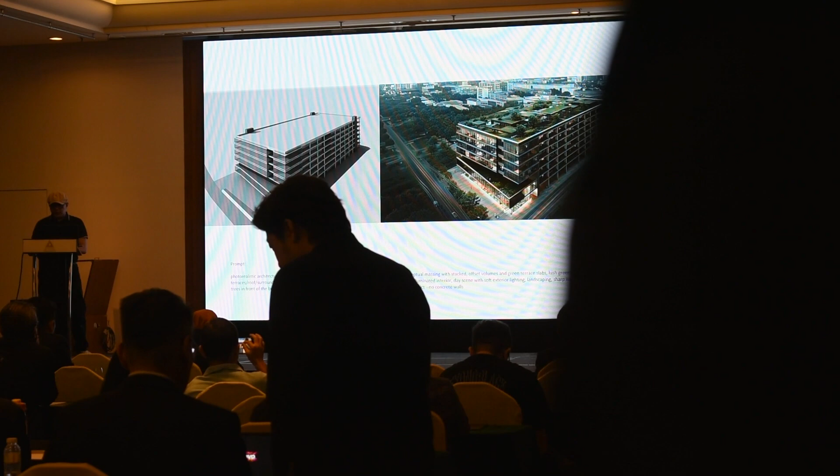And we came up with this. So in a matter of one day, we were able to do all this. It was very fortunate for us because we did win the project eventually, although the final design doesn't look like this. But I think you can see the value of making use of all these AI tools currently, because it will really speed up your production process.

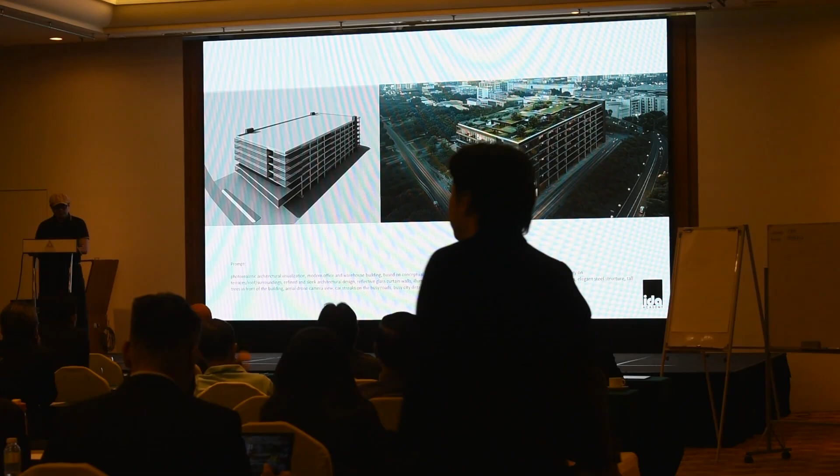This is another example of a very quick proposal. This one is in Sarawak, and we had a base sketch here, and then came up with a very quick visual also with the aid of AI. This is the sort of quality that we need.

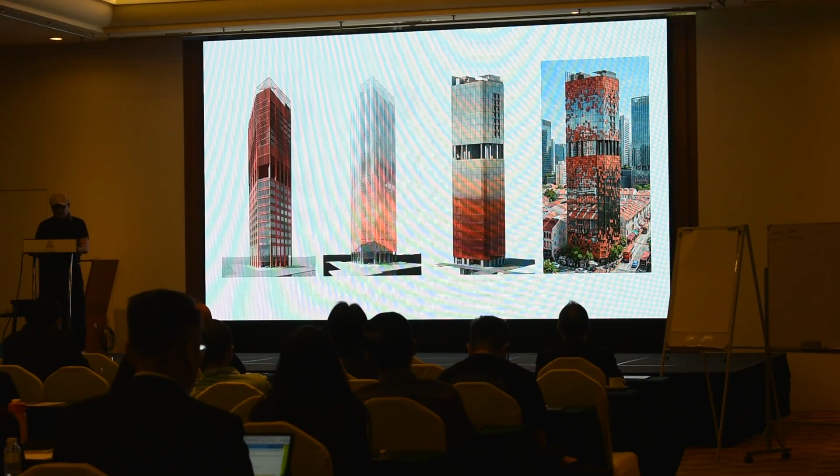For those who would be dabbling with AI, you'd understand why it's so important to have all these quick editing software, because AI is not exactly perfect. AI can generate anything, but there's a big but - you still need to modify it. It's not perfect at this stage, so human input is still very much important.